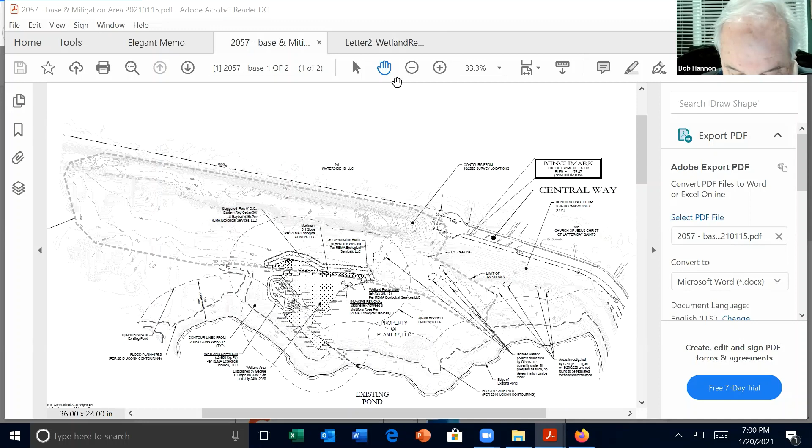First item on the agenda is under new business, show cause hearing, 1179 Farmington Avenue. I believe we've got the owner and all his representatives on the phone.

George, do you want to go ahead? I've got the sketch and your letter, so I'm happy to toggle between the two, and I can pull up aerial maps if we need to. I thought if you wanted to start, and then we have Ed on the phone that can offer some comments. I don't know if Bill needed to say anything before we start. No, I think you can get right into it, George.

Okay, great. So as promised, we have the next generation evolution of the plan based on some discussions. By the way, this is George Logan, REMA Ecological Services, for Mr. Miziarski. So at any rate, this is what we have, and you see the plan there, and there's two plans there.

That's the bigger scale one, and then we have a smaller scale, or is it the other way around? I always get confused with that. Anyhow, the other one's a 20 scale. And there's also a colorized version, which looks very similar to what I had shown the commission the previous time.

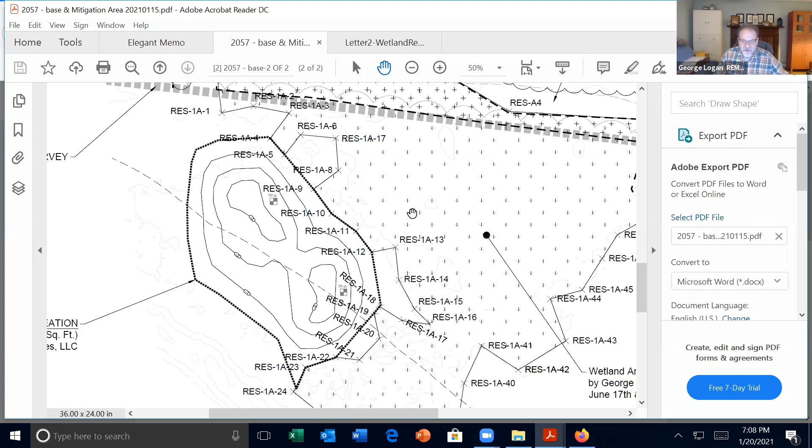So that's what you see there. Now, one thing I also showed, which I discussed previously at the demarcation buffer, is we talked about some eastern red cedars, one of my favorite plants, and also bayberries. We decided to do a staggered row, with one row being bayberries intermixed with the upper row being eastern cedars. We had 36 of one species and 36 of the other, across about 420 feet of demarcation buffer.

And of course, we still have it on the plan, there was a little dense concentration of invasive species in that one spot. That's estimated, and could be larger by the time we get there. We need to remove Japanese knotweed and multiflora rose, which, if we don't, will be a problem in the future, especially the Japanese knotweed.

Let's see, what else can I tell you about this? I think that's it. Shannon, maybe bring up the letter and show some of the pictures, and that colorized version of the so-called 40% plan. Might be 42%, I don't know, something like that. Probably should call it a progress plan.

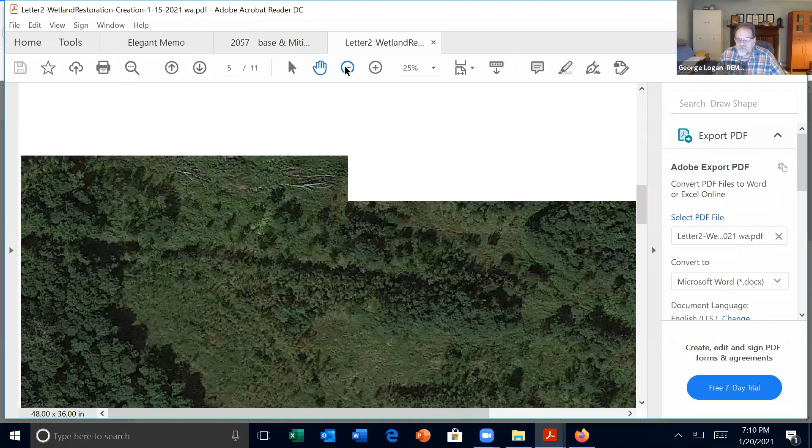So there it is. That gives you an idea of what it looks like on that aerial photograph. You've seen the photographs, I believe, and there's nothing really else to talk about out there.

Now, the way I figured out the edge of this 9,600 square feet was by using the aerial photograph first, then giving it to a CAD operator to put in. However, it might end up being a little larger because there's a slope on the east side of an earthen berm, and I was envisioning we'd probably go to the toe of the slope, which makes sense, and that might make it slightly larger.

But anyhow, I don't think the berm is... yep, right there. I don't know if this line Shannon is showing is correct, or the one that's the edge, but that's something we'll have to figure out before the final plan. We might have to take a few shots out there, and I'd also like to take a few shots within the general restoration area.

Now, there's one thing I keep forgetting about, and Shannon, you might be able to help me with this. At some point last year, we produced, or at least that's my recollection, a report regarding the rest of the fill area to the north. Did I ever submit that to you?

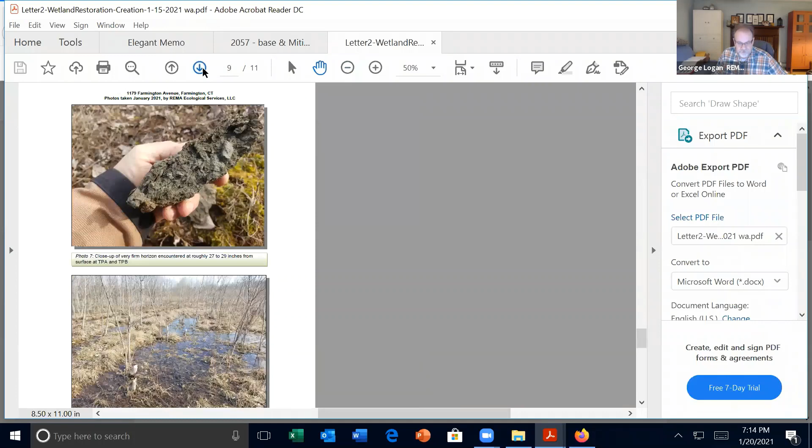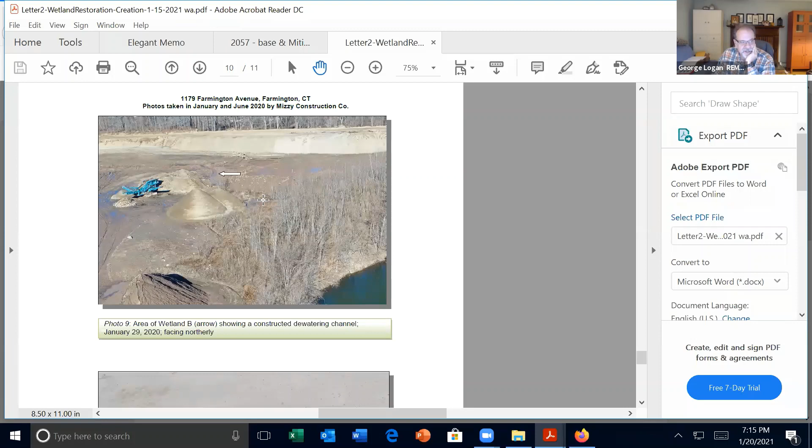I realize that because we did see some amphibian breeding activity back in the spring from eastern toads, and then we saw at least green frogs back in there as the season progressed. However, I did include some aerial photographs, drone photographs supplied to me by Mizzy, that in my mind conclusively show that Area B was actually a sedimentation area or trap. There was a channel very obvious in that picture, and another one that was dug to bring water exactly to that point. I remember going in there and finding some of that finer sediment that was there before I hit the red stuff underneath, which is the dense stuff that was there before. So this was obviously, in my mind, an area that was created as part of this operation.

And our thought was that now that its purpose is gone, and before breeding season again comes late March, to fill that, grade it out with the rest of the area, and then we're creating similar, if not better, habitat in our new creation area. So that was one thing I wanted to bring up and see what the commission's thoughts are on that.

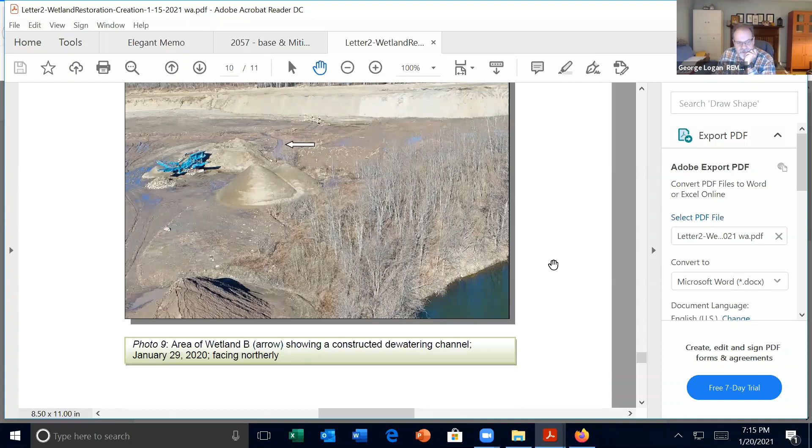The second one had to do with the pre-existing haul road. We had said, and we provided some aerial photographs that we thought were clear enough, that the haul road did go exactly through the area that we're going to restore. But I was using three different years of aerial photographs trying to match them up, and the lines were a little wonky one way or the other.

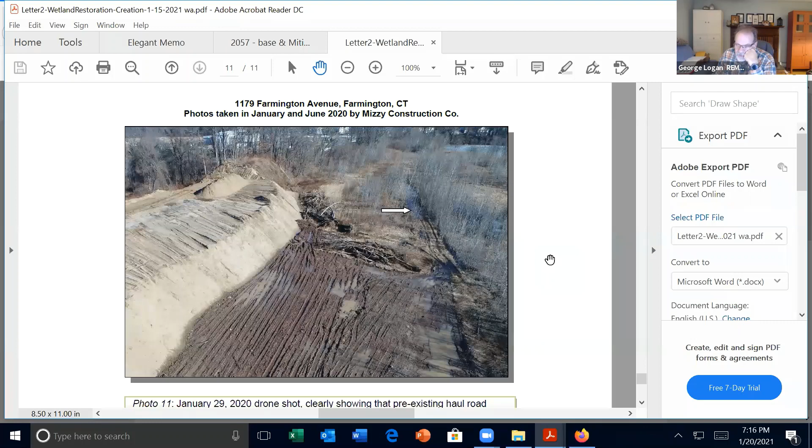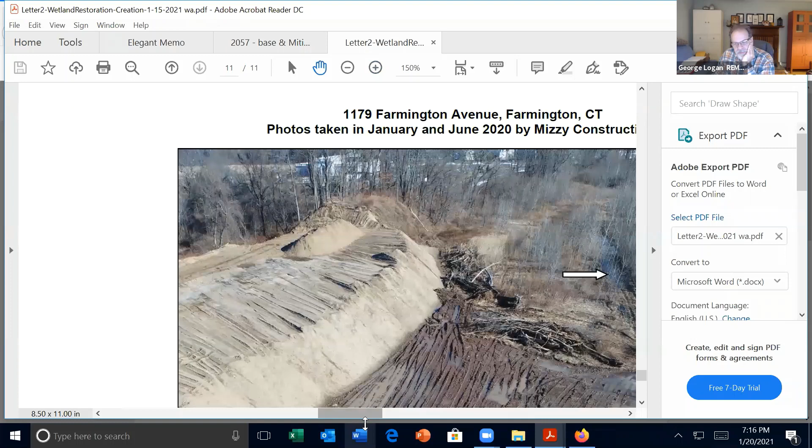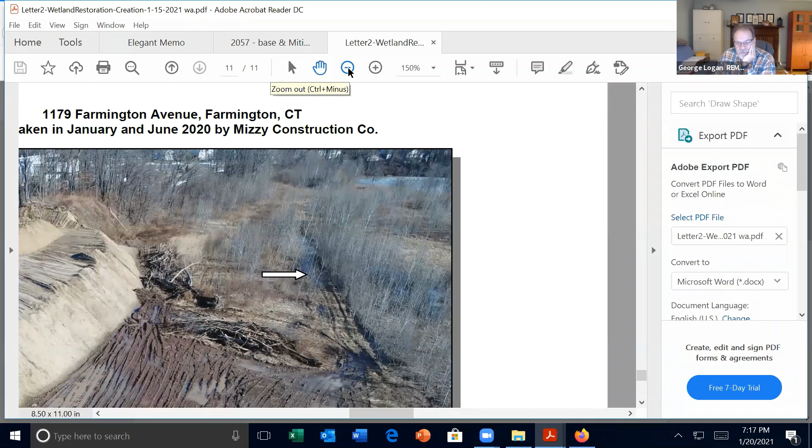So then I found these drone shots that were done literally days before the filling or destruction of that portion of wetland A. And I think, especially if you see the edge of the trees, how it's one straight line that goes through, and you match that with the previous aerial photographs, such as the one from February 2020, and then the ones we provide here, it seems clear to me that the pre-existing haul road, which was quite rutted from trucks, probably large trucks, went right through this area that we're going to restore.

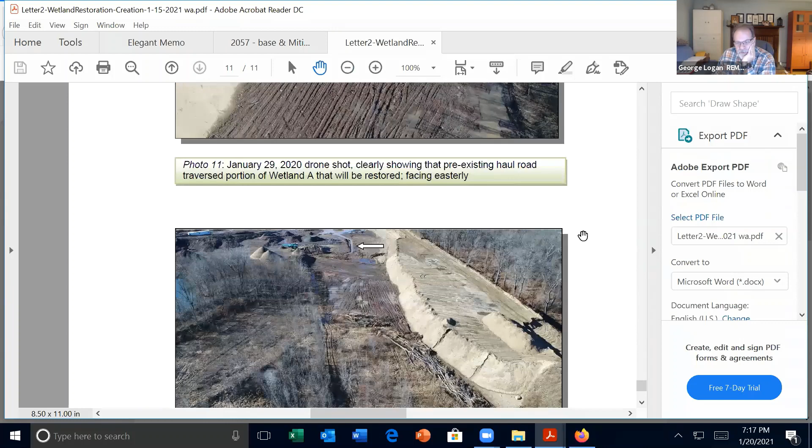Again, not a tremendous big issue, but I know there was a little confusion and possibly a little dispute. We're going to be restoring that area anyhow, so in a way that's a moot point, but we thought we'd bring it up. So those are the three items: the plan, the pre-existing haul road, and the filling of wetland B prior to this year's breeding activity.

Okay. And that concludes my presentation.

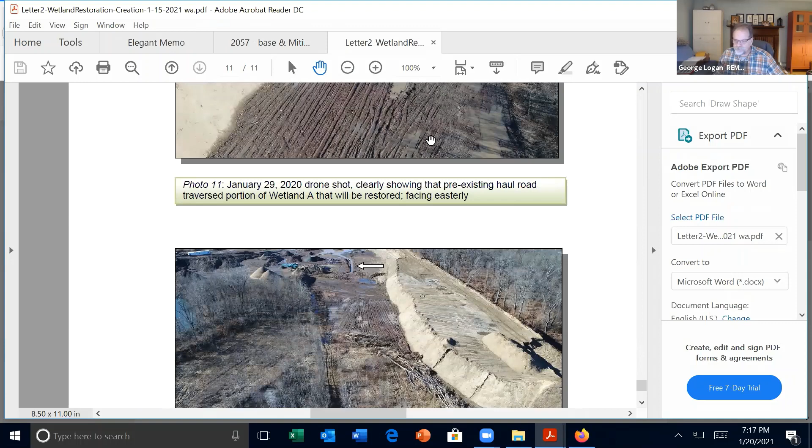Okay, George, I have a question for you. In looking at these drone photos, like the one that's up right now, use that as an example. So that was taken January 29th, 2020. Now, the soil was moved from where it is on the right-hand side and moved to the left-hand side, up to and including the haul road.

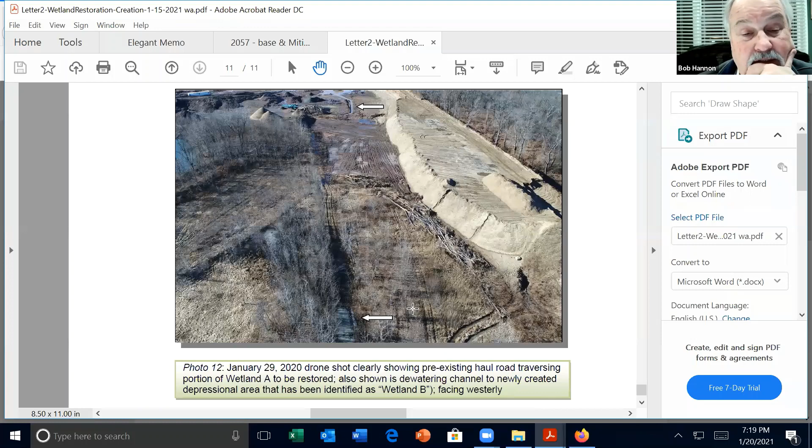That's right. Okay, Robert, you may need to help me on this, but what happened with all of the trees and wood that were on that site? Was that removed or was that buried in place? That I do not know. I don't know who could answer that question. I would assume that if you wanted a stable surface, that those would have been removed. But that's probably a question for Mr. Misiorowski. And the reason I'm asking is because it looks like it could be more than 10 cubic yards. So that's why I want to make sure Robert's sort of thinking the same way I am on this.

Bob, this is Robert Eiser. Yeah, I mean, looking at the photo, it certainly looks like there's tree debris which would be classified under the Connecticut Solid Waste Management Regulations as solid waste. So you're correct, 10 cubic yards would be a threshold for creating a solid waste landfill if that material was left in place.

We just probably would have wanted to bring that up as part of the discussion because that's what the photos are showing. There's a lot of wood there. So that may be something that you need to follow up on to see what was done with a lot of the wood that was dropped in place out there.

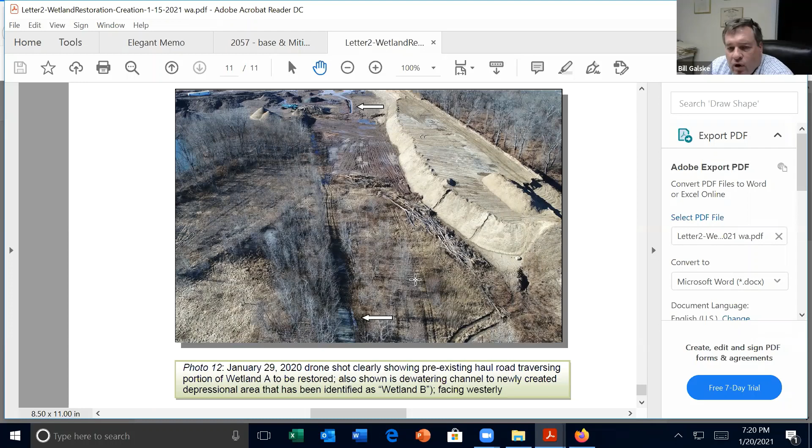Can I speak, gentlemen? Sure. Yeah, I recall when we did our last site walk, if you go back to the area of wetland B, and remember the path of the roadway that leads down to the river, right in there, somewhere in that approximate area, when we were just out there in November, there was a large amount of wood that was lying there. So that may be the wood.

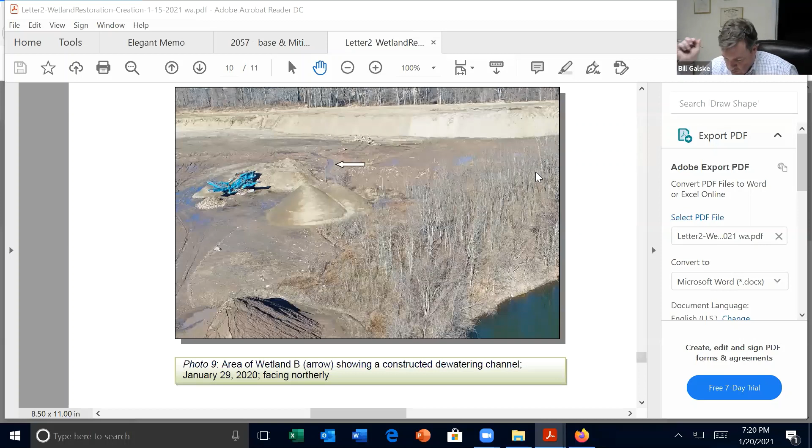I don't know if we have another, if there's any other pictures that would show it, but I clearly remember there being piles of wood that had been moved there. I don't know if maybe some of the earlier pictures we can look at in the SharePoint site and try to find it, or else just go out there and see that it's there.

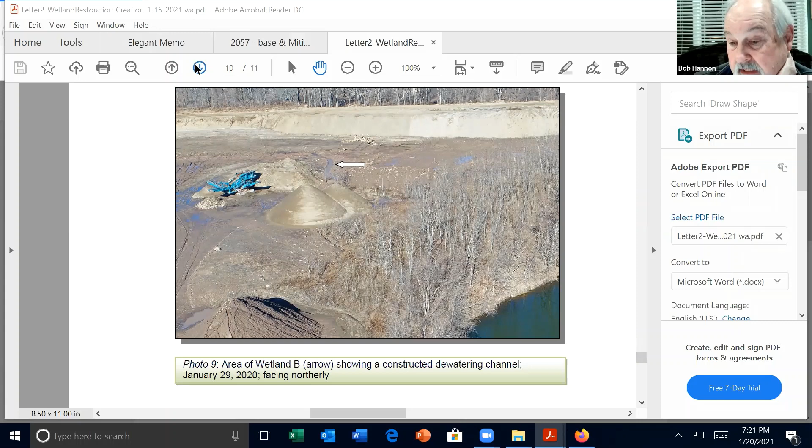Yeah, I mean, the reason I'm bringing up the issue is because if the wood was in fact buried there, that may have created a different problem that is unaffiliated with the wetlands issue. So I'm just raising that issue because the information has been provided to us about the photos, and I'm seeing a lot of wood that's lying out there, and I would just like to know if that wood was removed. Like you say, maybe it was moved to the front of the property. If that's the case, fine. But if it was buried on site, to me it looks like more than 10 cubic yards, which creates a landfill scenario that has not been licensed. So I'm just raising that issue. So somebody's going to need to look at that from your side just to see what was done with that wood. Okay.

I'll take on that, and it may be a simple answer. I'm not saying it isn't, but if it was buried in place, that creates a different issue that's going to have to be addressed, maybe not so much through us, but at least another entity in the state. So, Robert, is there anything else you want to add to that?

No, as you noted, Bob, those are just the statutory definitions for land clearing debris and solid waste disposal area. And Mr. Chairman, I'll note that Commissioner Simpson sent a chat that he has entered the meeting at 7:20, in case you or Shannon didn't see that.

I did see it. Thank you, though. Thank you.

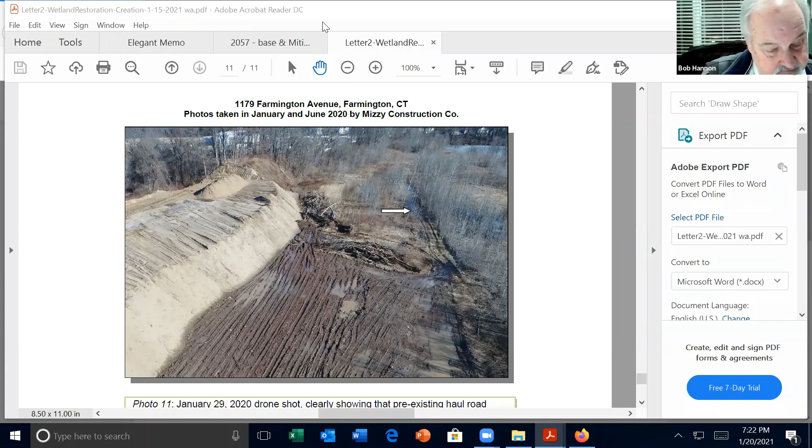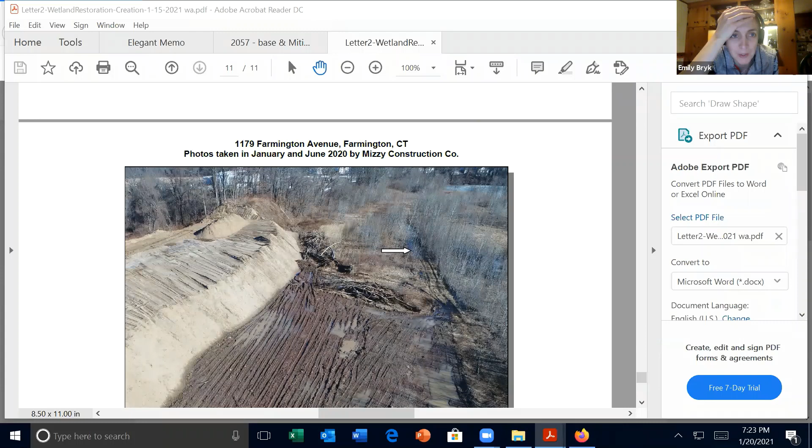I mean, I'm very interested in the disposal concern. I have some questions I'm working up, but would you mind coming back to me? I get a lot of going first anxiety.

That's fine, thank you so much, Bob. We can move on to Dave. Oh thanks, I'm gonna throw him under the bus.

Yeah, I guess I have a couple of questions. I would like to hear from Ed about his reaction to this buffer plan. Going from 15 to 25 is a step in the right direction.

I think there was talk last time of maybe looking for 50 feet. I understand that this buffer is just for the present, and when in the future some development proposal comes in, we would have a chance to look at appropriate buffer for whatever activity is being proposed. I was just a little bit concerned that if we establish a 25-foot buffer here, the pressure will be to not expand it during some future application. So I think that should be kept in mind as we proceed here.

I guess that's about it for now. Thank you.

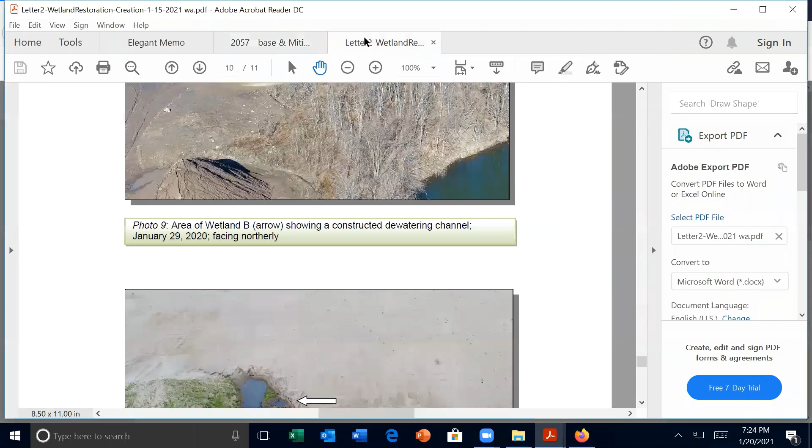Anything about Wetland B or the other comment that was made? I guess Wetland B being a year old at most, and man-made, if those two sump areas in the created wetlands can replace that habitat, it's certainly in a better place. So I'm not overly concerned about that.

Okay, and Shannon, I want to go back to you for a second on the Wetland B. Wasn't that part of the dialogue in terms of where the concrete barrier was supposed to be placed? Correct, Bob, that was part of the dialogue during the last meeting. And we specifically said we were gonna try and stake that barrier between Wetland B and the piles so that Mr. Mizzy had access to those piles.

But staff has issued the revised enforcement order to allow the activities that were discussed at the meeting earlier in January. At this point, to my knowledge, those barriers haven't been put in place. We had specifically requested that we be notified so that we could be on site when they go in place. But to my knowledge, they haven't been placed. So that leaves this open for discussion with respect to that for the commission.

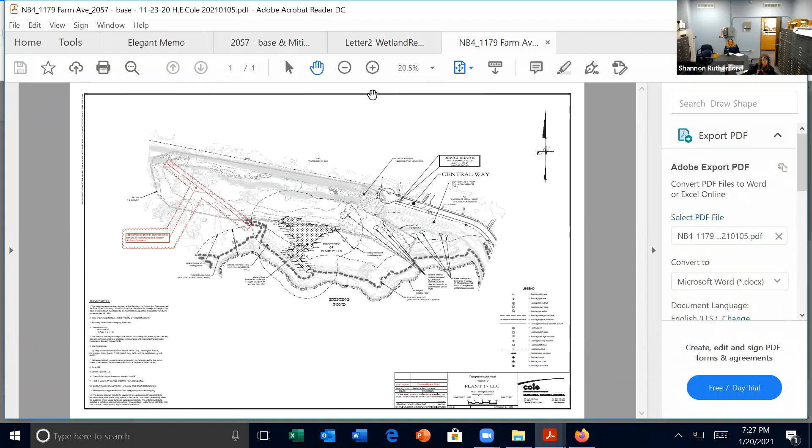There we go. So this shows the barriers, and I've got to see, so this one did not show Wetland B. Give me one sec. That was located to the east. It was, I just—

So here, so we've got to put the aerial together. I think if I recall, I used the edge of the pond as the reference. So we've got the edge of pond, and Wetland B basically shows up, and you can see these two piles.

And so it should line up with the edge of pond. And then if we click back to where the barrier is, so edge of pond, there's certainly a heavy contour here. So we were loosely discussing that Wetland B was somewhere in this proximity. We're just trying to compare the two documents. So yes, we had discussed kicking the barriers down

so that it left access to this material, but still protected the wetland. As I noted that, Attorney Galsky confirmed the barriers haven't been put in yet, so that work hasn't taken place. Okay, I just want to make sure I was thinking clearly on this and had the right picture in my head. Thank you.

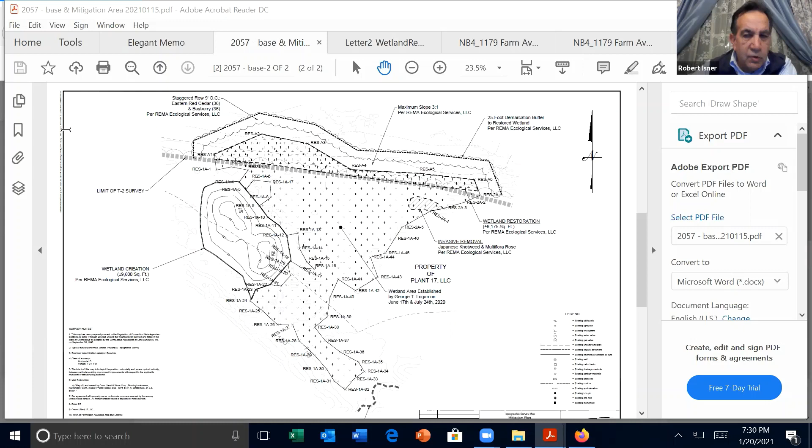As Commissioner Fox said, I'll be interested to hear Ed's take on the most recent report. From the overview provided by George, it's good to hear that Wetland A is going to be fully restored. On Wetland B, I think it could be okay for the proposed filling, but I'd want to hear Ed's take on the functional value. When we were out on the site walk, it looked like it was supporting some amphibian life, so what was recently created may have value. If it's low, filling could be okay as part of the overall plan, recognizing there's going to be enhancements and mitigation elsewhere. I also agree with Commissioner Fox that going from 15 feet to 25 feet as the buffer distance is good, but I have that same concern that once we establish 25 feet as the buffer, it may be difficult to increase that. So maybe looking to increase it out to 50 feet now would be prudent on our part. The haul road discussion seemed fair, the explanation was fine, and the proposal to restore that seemed good at this point. That's the end of my comments.

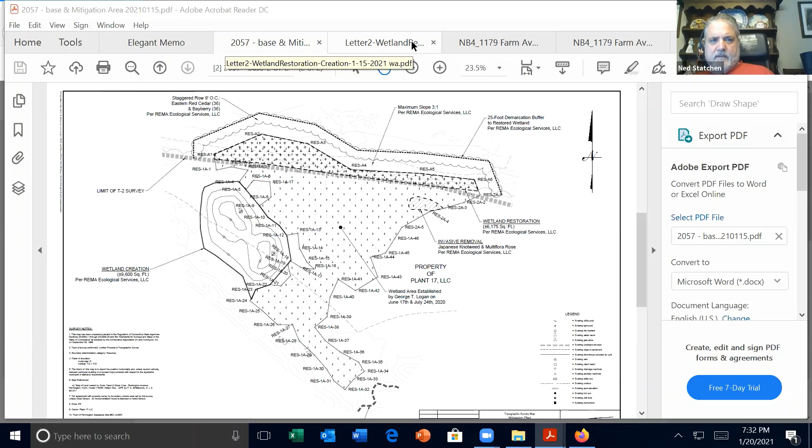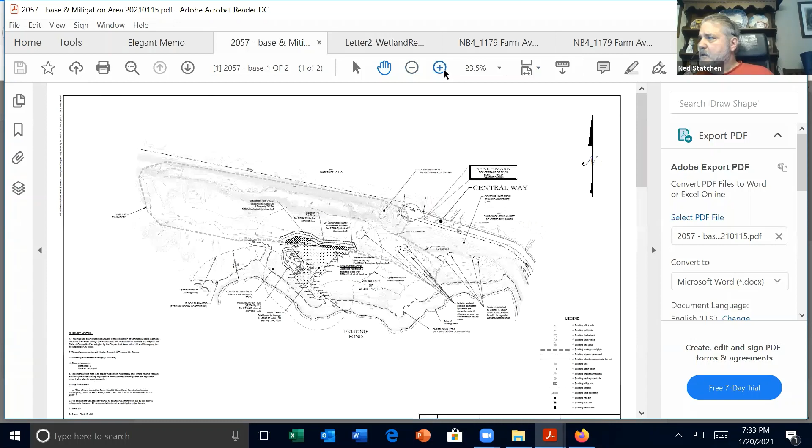I was muted, sorry. The wetland creation area is 9,600 square feet. I want to know, what is the approximate area of Wetland B? Do we know that? Probably about 1,000 to 1,200 square feet. Okay. And is this still going to be out of the floodplain, the wetland creation area? Because I would think it could. Yeah, it is. I think you can see in that map in front of us right now, the dashed dark line at the bottom of the screen, that's the floodplain elevation. So that's how close it gets, but no further. Okay, I see. So you're going to be well out of that.

I would just kind of go along with the feeling that if we increase the wetland area with the creation area substantially over what Wetland B is, then we might be able to live with filling in Wetland B. Like you say, the timing of it is important. I'd like to see it before anything started to take place in the springtime. But that's all I have for now.

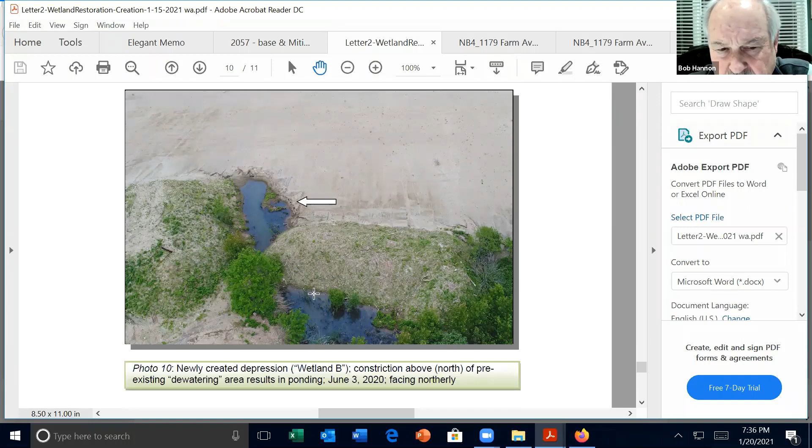So George, do you have an idea as to what the purpose of the sedimentation basin was originally? Or can somebody else answer that? I'm just curious as to, one, why it was created, and then to follow up on that, why it's no longer needed. Is the activity that needs to be conducted no longer taking place on site?

Well, my understanding is this: when this work was being done, they wanted a place to get the water to. So they didn't go to the pond, didn't go to the Farmington River, but it went to somewhere where it would stay there and infiltrate. And that was the idea of getting that swale down to that area, and it ended up with all the work that was done around it creating this depressional area.

Obviously, because the land got raised on two sides at least, right? So it kind of isolated, and the water kind of connected there. But that was the idea. Now it's not needed anymore because this area has been sufficiently stabilized, at least to a great extent, and so it has been abandoned.

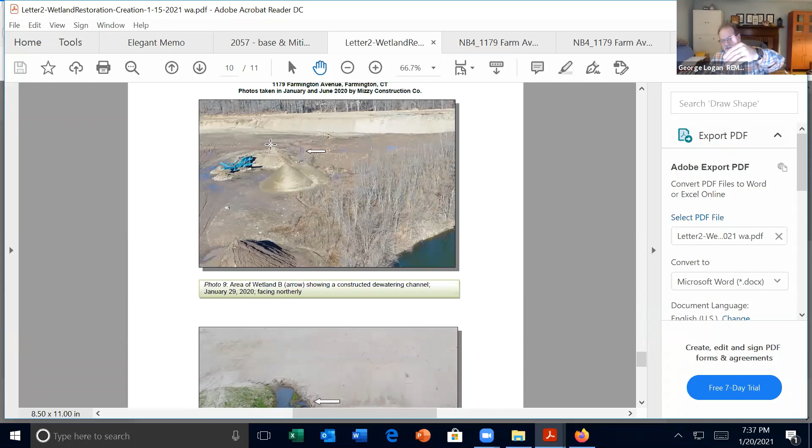And plus, what happened at that time, if you see the early picture, there was a pitch from the west coming to the east and then down here, and then when all that soil from the berm got placed, it raised it up, so the water couldn't get there anyhow anymore. But in the early portions of the operation, that's what was happening.

So that sedimentation basin was not initially put in to minimize any type of sedimentation associated with specific activities of the project. It was more just for trying to collect sediment and infiltrate water. Am I hearing that correctly?

For the most part. I mean, I can't completely say, I wish that Stanley would probably be the best person to talk about that, but that's my understanding from talking about it, that when they were doing this operation, they needed to get the water out somewhere, and so they decided to create that swale in the early portions of the operation, and then as it progressed, they didn't need it anymore, but it was there because they created it.

Okay, again, I'm only asking because usually when you see a sedimentation basin go in somewhere, it's typically because there's some activity that is going to trigger the need for that. So I'm just trying to make sure that I understand if there was or was not a specific activity being conducted on that site, which would have required the implementation of a sedimentation basin.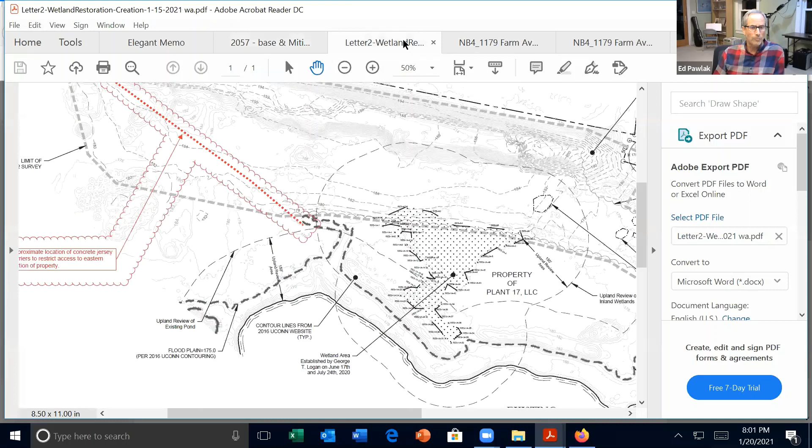Before I leave wetland B, I wasn't aware, since I hadn't explored it, of the area to the south of wetland B, which Mr. Logan described as the southern lobe of wetland B. You can see the pinch point between the delineated wetland B and the ponded area to the south. That's the area Mr. Logan was describing, where he mentioned observed cattails and phragmites.

I've not explored that area at all, but given the unpermitted filling of wetlands that has taken place on this property within the past year, I recommend the commission request that the applicant have that southern lobe of wetland B delineated, surveyed, and put on a map for posterity, so there's no question in the future that this area was determined to be a regulated wetland at this time.

Finally, regarding wetland B, there's an area to the west which has not been delineated as a wetland, but in my previous letter I included photos of it, a similarly ponded area. It may have been a sedimentation basin, I don't know, but it was ponded each time I observed it. It's to the west of wetland B, off the stone. That's the approximate area.

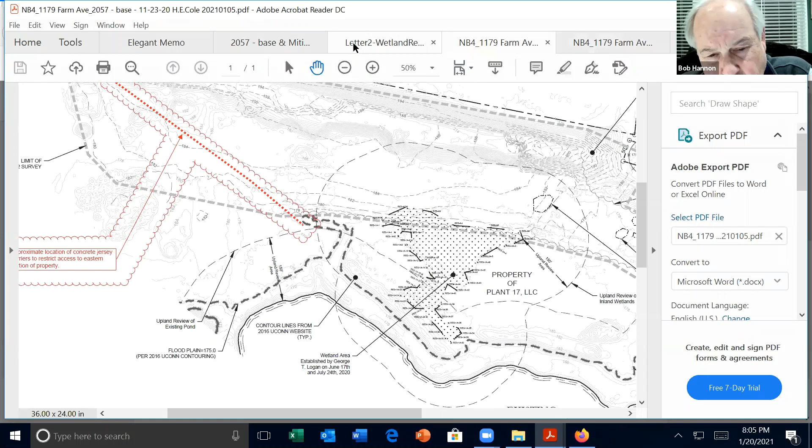With a 100-year flood it may get up, but if you've got some pockets in there similar to what you've got with wetland B—I don't want to say wetland B acts as a decoy pond, because you're actually seeing enough water in there for the tadpoles to survive, grow, and hop out on their own—but if that was something, if it was man-made to start with, is that something you could tap into, that 100-year flood elevation, as a way of getting a little more natural water in there based on flooding control, but yet maintain a depression so you still keep the water in there, in addition to any type of surface drainage?

That's an interesting point. We can't determine from this map, because wetland B is not shown, what the relationship of wetland B is to that 100-year flood line, the floodplain line.

What I'd say off the top of my head is that I wouldn't want to rely on the hydrology provided by a 100-year flood to support the hydrology of the mitigation area, or of wetland B, because its return interval is 100 years, at least theoretically. So you'd expect that area wouldn't be flooding every year, yet you want an amphibian breeding habitat to be flooded on an annual basis, seasonally or semi-permanently. So I wouldn't want to rely solely on the hydrology of a 100-year flood.

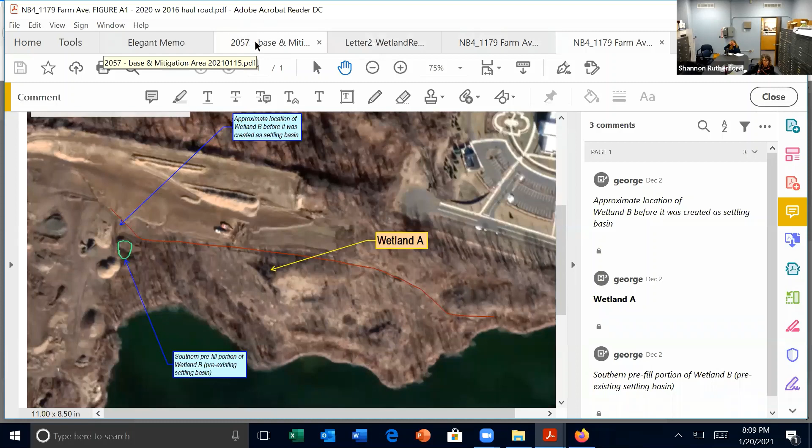Yeah, I can't do these. It's hard to see it on that. It is, yeah. And I can't get them up side by side with this. I can't split screen.

So we would need to have it surveyed and shown here to know definitively. Well, we do know under existing conditions that excavated wetland B does pond and trap water. It receives surface water runoff, ponds it, traps it, and holds it for an extended period of time.

The proposed mitigation area is outside of the 100-year floodplain zone, so we wouldn't be expecting that flooding in a 100-year storm is going to be coming up there or that it arrives at wetland B. So we shouldn't rely upon it. The surface water would have to be coming during more frequent storms from the drainage area.

I think we need to be mindful too that Army Corps and DEP are staying at the periphery of this and continue to be updated. It's been a month or two since I've had to update anybody. But they're looking and trying to maintain assurance that there is not a hydraulic connection to the pond, because we do know with certainty that the pond is connected to the Farmington River.

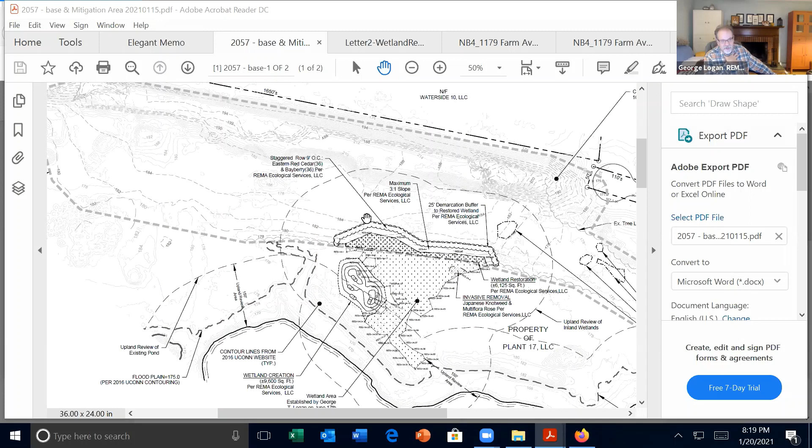I have a list. There are several commercially available native pollinator seed mixes from at least a couple of sources that I can think of. But we've also, what we've done in the past, for instance some of the solar projects, is to specify and tailor our own seed mix from getting individual seed sources from, say, Ernst Conservation Seeds, putting them together for our region, and creating our own pollinator mix. So we could probably do something similar here.

I mean, if an area has to be restabilized, to me, if we can do something like that, it's beneficial, rather than just throwing grass seed mix down, whatever the composition is. At least this way you're creating a more favorable environment for a number of different species, and it all blends well together from a natural perspective. So I'd be looking at something like that. Certainly will incorporate it. Good idea. Thank you.

I can't think of anything else at this point in time. I'll go back and take a look at some of the stuff, and after my head stops spinning a little bit, try to figure out how we're going. But I think some of the comments I've heard from people tonight is that we appear to be going in the right direction. I think that's the biggest thing.

We're seeing some plans come in. We're able to start taking a look at them, make some comments. There are some things that we need to think about. I'm not ready to take an action on Wetland B tonight. That's something I've got to think about more.

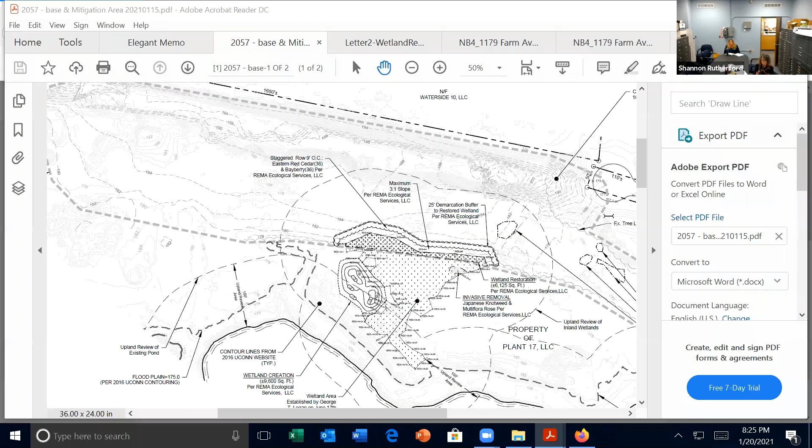And we're looking really a month from now. So I think we need to provide—and I'm open, tossing this out—so Wetland B, if we're talking about filling it, that decision kind of needs to be made by that first meeting in March, if we're going to avoid the breeding season for this year. We might have a little bit of leeway if Mother Nature decides to throw a hard freeze on us, but at the rate things are going, those frogs are going to be jumping here.

Okay, I just want to follow up on Wetland B for a moment. George, first I'll go to you. My understanding, if I'm reading the picture correctly, there was a bit of a swale that was created, which intercepted water and discharged it into a lower dugout area. So you had a swale created which helped redirect water into what is now being identified as Wetland B, correct? To some extent.

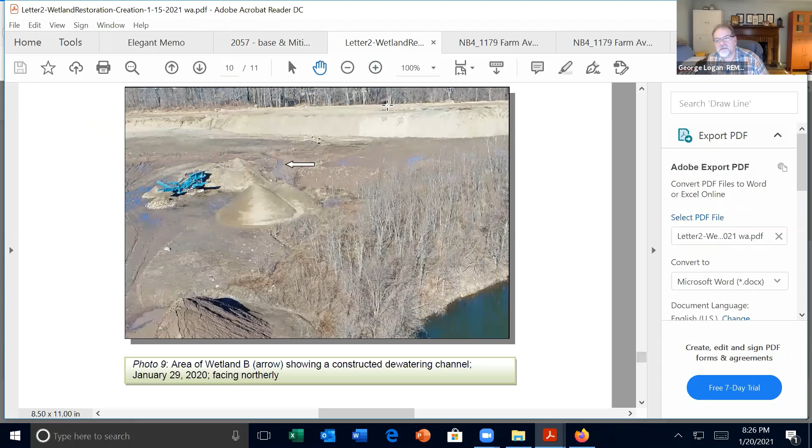So there it is. The swale was trying to redirect water to the southern portion of Wetland B that Ed was saying should be delineated for posterity. And in doing so, with the grading that happened around the northern portion, it created this other flooded lobe. But the intent was to get it to the pre-existing area that was used for sedimentation and water control purposes.

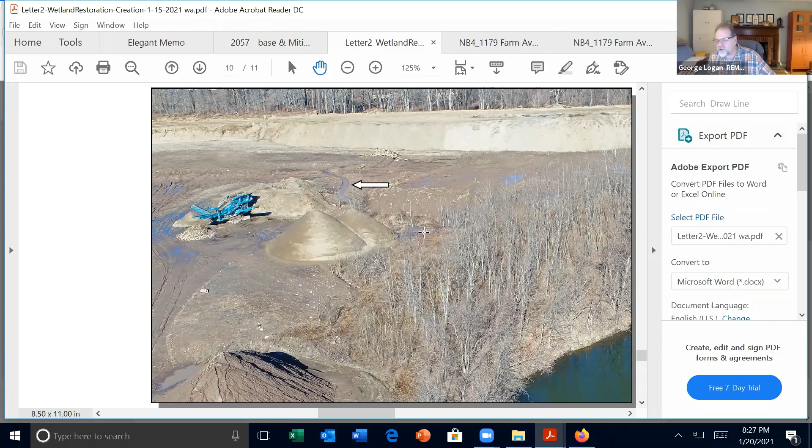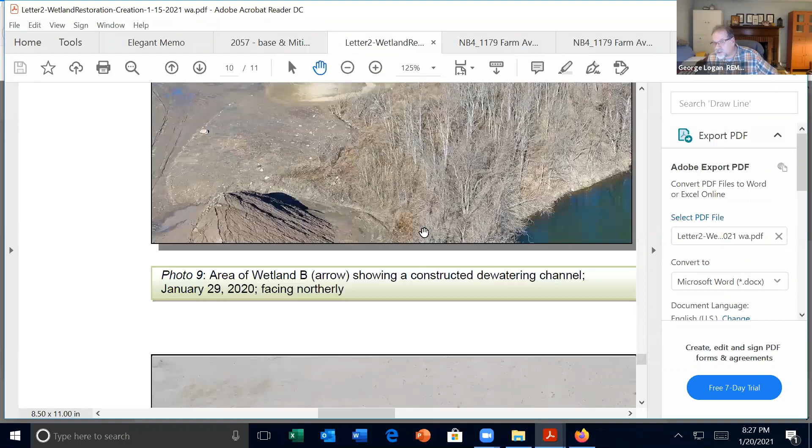By the way, even though I don't think any of us looked at it, when we were seeing the tadpoles in the northern portion of Wetland B, we never went and looked at the southern portion. But I would suspect they were there too, and they'll continue to be there. So that's a good thing. Even if this area was filled prior to, it's not like the frogs and toads don't have somewhere to go. They do, and they'll go there. But I can't say that with 100% certainty because I didn't look at it.

But that's kind of where I'm going with this. You've seen designs for some of the solar projects, like you mentioned earlier. You'll see some drainage swales incorporated around the perimeter of the site to redirect water to a specific sedimentation basin, detention basin, whatever. And I'm just wondering if

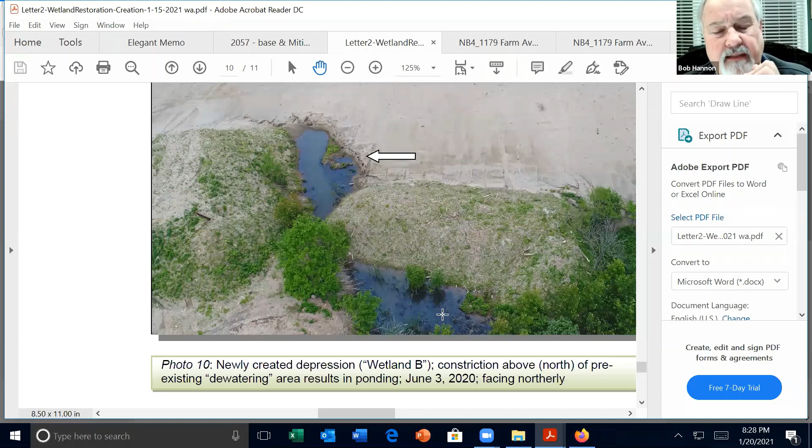this was created by putting in some drainage swales to start with. If this area was filled, would it still be possible to install some type of swale that could be stabilized to move the water further to the east and potentially enhance the wetland area over there? I'm just throwing that out against the wall.

Ed, I don't know, you may think I'm totally crazy on that, but if you had water coming from the western part of the site and it's at least ponding in an area, to me that indicates you've got some water coming through there. But if that swale area were extended to the east, is that something that could help out in terms of maintaining water for the integrity of the wetlands for Wetland A?

That's a good question, and that's something I would have to specifically contemplate without saying something off the top of my head, which I will. If you recall, when we got to the eastern edge of the existing construction area, we climbed up a little bit into the fill area.

So I think the water that used to come this way doesn't come there anymore. The only water that gets to that northern portion of Wetland B is from what's to the north of it, and possibly a little to the west, to the east of it. But again, I'm kind of talking off the top of my head here. So, George, so am I. So don't feel bad.

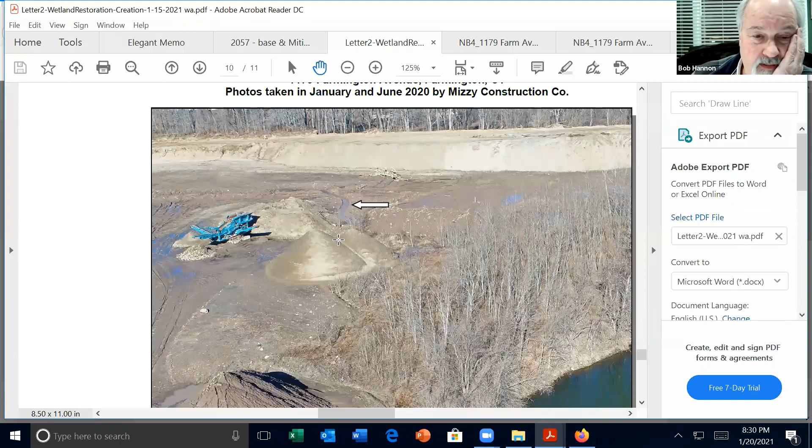I'm going to be out there doing stuff, so I can look into that and come back. But I'm also curious, Ed, is that something that may be realistic? We've used drainage swales in the past to redirect water to certain areas, and some of those swales were planted with specific species to help with water quality. I'm just wondering if something like that is something we should be looking at too—maybe not so much for Wetland B, but taking that water and getting it over more towards Wetland A, which may sustain Wetland A over a longer period of time.

Interesting thought. But I think it all goes to the process that George is going to have to go through in determining whether the drainage area for that proposed mitigation site is large enough to recreate that ponding hydrology that you're seeing right there in the photo in Wetland B.

He's going to have to determine what is the drainage area, how much surface ground is going to contribute runoff down to the mitigation area that I'm proposing. And if it's small, you might start considering what you were envisioning, perhaps a swale to intercept runoff and divert it and bring it over to the mitigation area.

It may be that George determines it's actually not necessary to do that. There's a pretty good sized drainage area already that's going to be contributing to this depression we are proposing to create here. I would suggest, though, for George to think about as well, is to at least estimate the drainage area that's contributing to this wetland B.

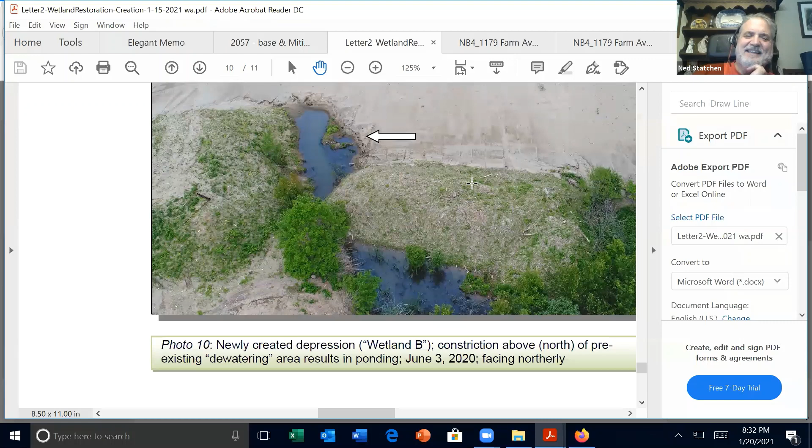This is Ned. I had one other comment, is that I know Ed has concerns in regards to saying, well, yeah, wetland B, the relocation area for wetland A, or recreation area for wetland A, or off of wetland A.

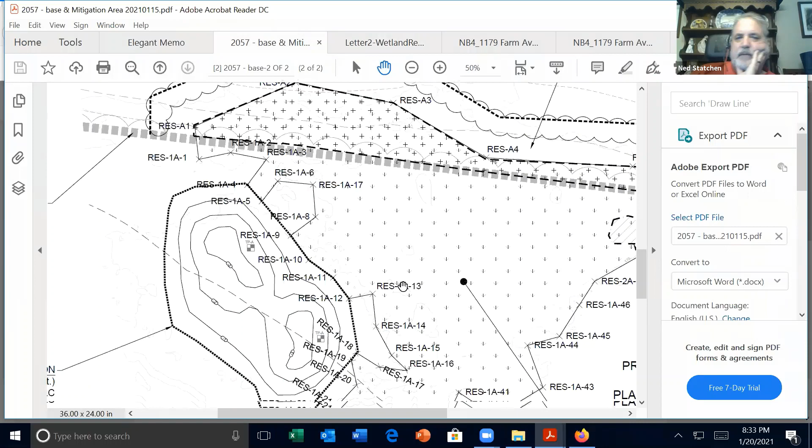It's tough to count on if it's only lines on paper, and wetland B was something that's kind of working. But if we go ahead and include a monitoring period, so that we know if the wetland creation area isn't working, then they're obligated to make adjustments to get it to work. So I think the fact that it's in a much better place for the wetland as opposed to wetland B, right in the middle of all the activity there.

I think we might be worrying too much about whether or not it's going to work, and if we include the monitoring in our final recommendation, so that we know that it will work eventually, because I think the fact that it's relocated to a better area accounts for a lot. So that's just something I'm considering.

Although if that's just a dry basin that's excavated, that won't be functional. Right. But we'll know that with the monitoring, and then we'll have to figure out a way to make it work. They'll have that obligation.

So one of the things that comes to mind, and I'm not necessarily suggesting this, although it's kind of a novel idea, we know that there's water in wetland A. As a matter of fact, you saw the picture from the other day. Obviously it's the high groundwater season right now. If one dug a hole in wetland A down to the confining layer, that would fill with water.

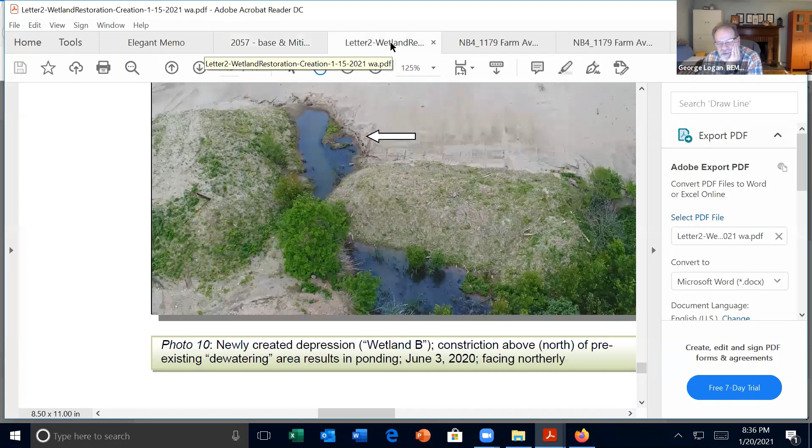So I think the total was about 5.5 feet. I went, and as you can see from the pictures, I put my auger there. I should have had a tape measure when I did it, but I didn't. I forgot it at the car, and I was too lazy to go get it. So I was using my auger as a measuring stick, if you will.

But we went down a minimum of 5 feet. So my auger is 42 inches, and it hasn't reached the top yet. Okay, yeah, so that kind of gives you an indication. And the other one is about the same.

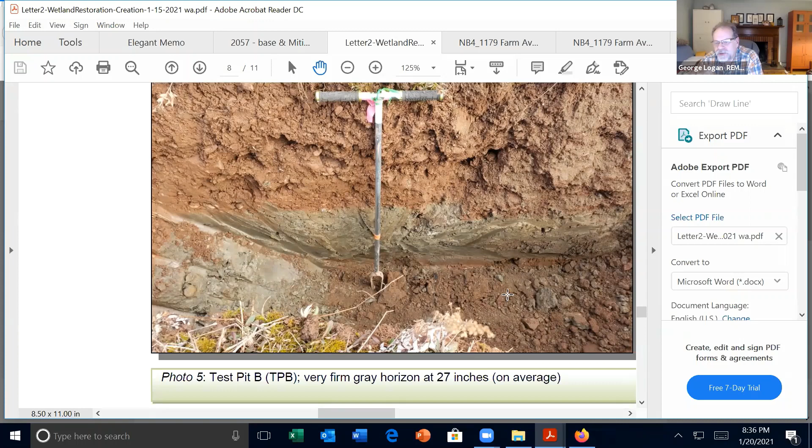And at any point did you have water seepage in on any of them? It's tough to tell in the photos. No, I didn't. And that's a good observation, and one that I'm mildly concerned about. But again, that material there, the red material, is somewhat different from the material that immediately underlays wetland A, which is a little more coarse.

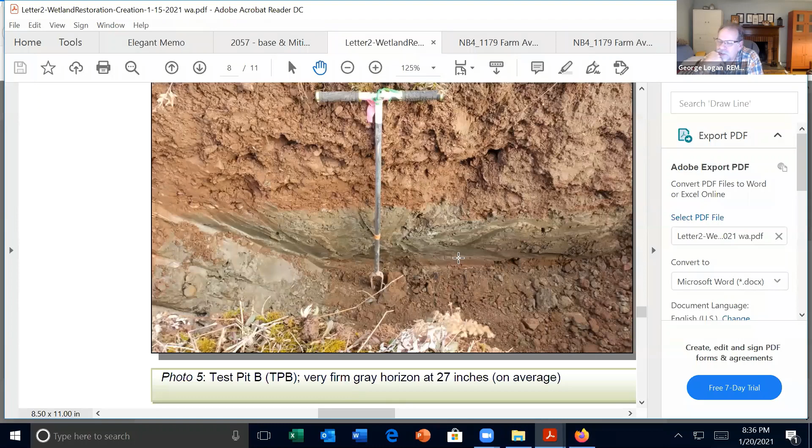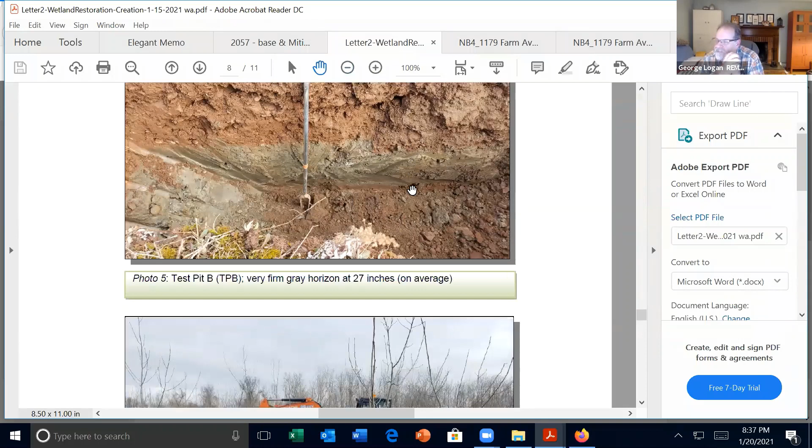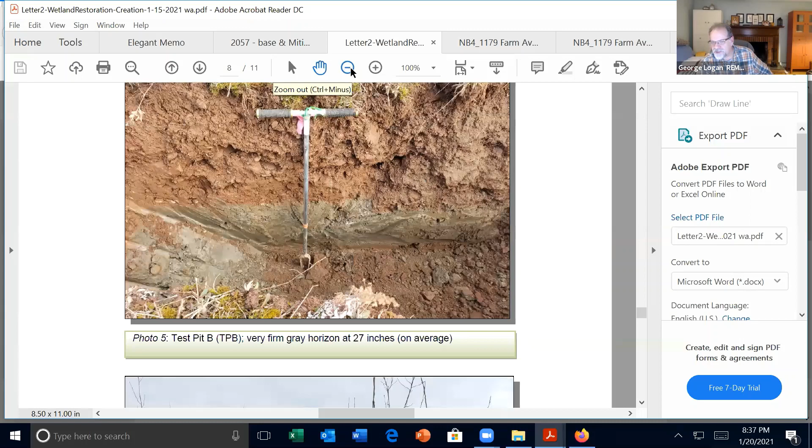So the thing that we're going to have to figure out here is how we can key the mitigation of the created area to Wetland A and to its watershed. And if we can do that, then we're going to have a guarantee. The conservative approach is also to utilize that organically rich topsoil, which will have a higher water carrying capacity, which will keep things moist and wet for a longer period of time. So those are some of the thoughts that I'm having.

But again, Ed is right. Hydrology. Okay.

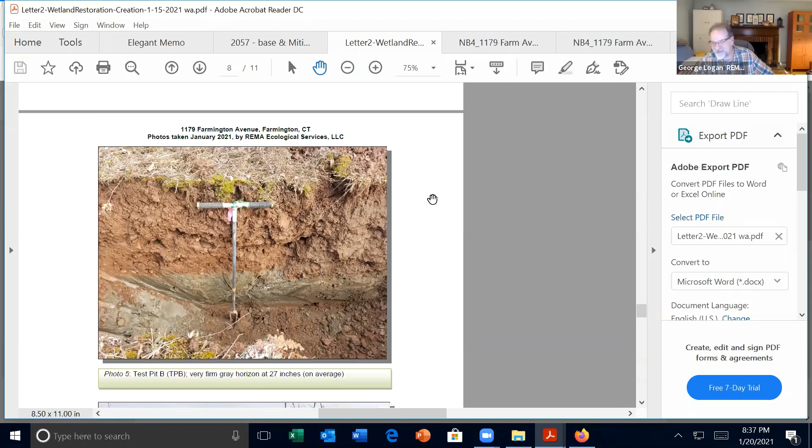It sounds like we don't necessarily need a written document from Ed outlining his thoughts from this evening. I'm thinking maybe we'll say let this advance to the next step. As you folks have additional information on Wetland B, we can put this on the agenda for two weeks from now, see where everyone stands, and then go from there.

I think the way that I'm looking at it is that at the far end we're going to have detailed implementation notes - how we're going to do this, what's the procedure, et cetera, planting schemes, seed mixes, et cetera. But that's out there. I think some of the things that Ed raised today, such as ensuring the hydrology of the created area, and looking at the demarcation buffer and its slope, and looking at some of those seed mixes we could put in there for enhancing that.

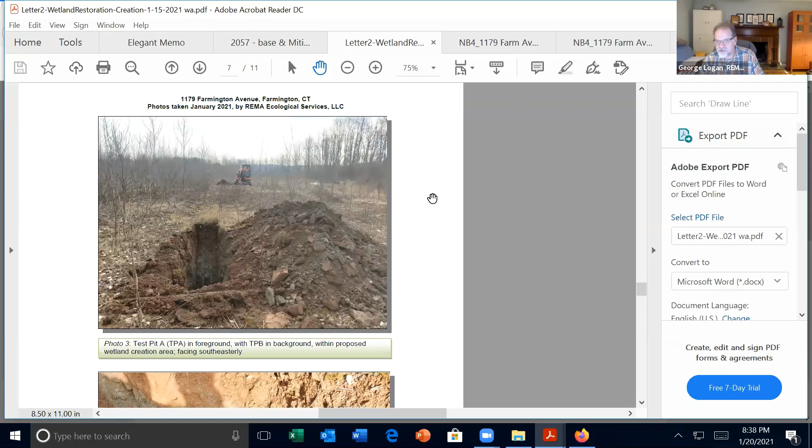Those are all things that I can do first. Whether I do it in the next couple of weeks - yeah, I probably can do some of that in the next couple of weeks. So we can at least advance it to the next point.

Commission members, as you're reviewing this, if additional specific information or questions come up with respect to Wetland B, and what you would need to make a decision with respect to filling that - if something comes up, feel free to email me and I will pass that along to both Ed and George simultaneously, so everyone's getting the question at the same time. We'll put it on the agenda for two weeks from now and see what else gets added to the agenda, and we'll go from there with how we organize it.

Okay. But I would like to thank everybody for a nice, healthy discussion this evening. I think it was very beneficial. Thank you. You're welcome. Thank you.

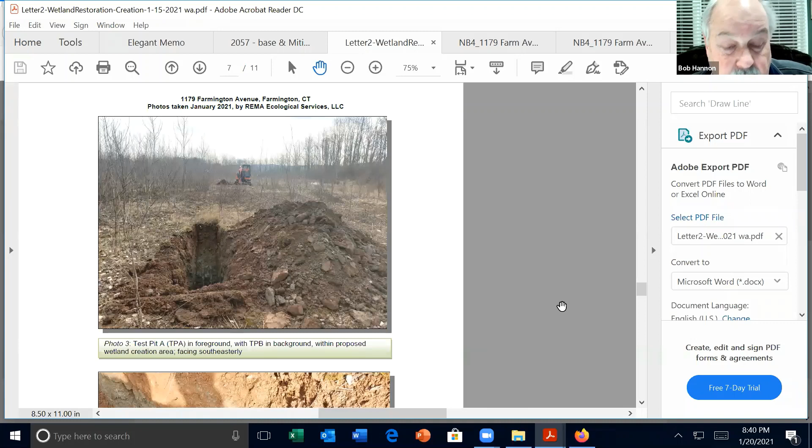So I think that's it for new business tonight. Unless Attorney Galsky, you have anything else to add on this matter? Otherwise we're going to move on to other items. No, I'll just follow up on that other issue with the wood. Okay, thank you. All right. Thank you. Have a good evening, everyone. Good night, take care.

Next up on planner's report, 16 Clearbrook. I just wanted to provide a status update.

The owner has engaged Ian Cole from the last meeting, and he also has had Juliana Pools out. Rather than an engineer, they're working with a landscape architect on this, and so they're going to use the survey - they've got a recent as-built survey - to get this all laid out and have everything identified. So the owner's been fairly conscientious, following up and keeping us up to date, and sounds like he's engaged the appropriate professionals to continue to advance the plan for his backyard, as well as the restoration needed for some of the cutting that had taken place. So that's it for an update on that one.

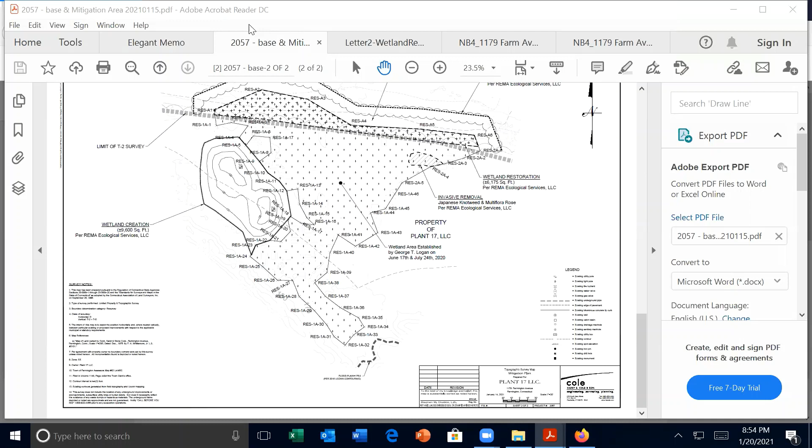All right, so if there's nothing else, we have the minutes of January 6, 2021 for the Conservation Commission meeting. Can I get a motion to approve? So moved, Statchen. Is there a second? Second, Statchen. Okay. Any questions, comments, corrections? Hearing none, those in favor? Aye. Opposed? Abstaining?

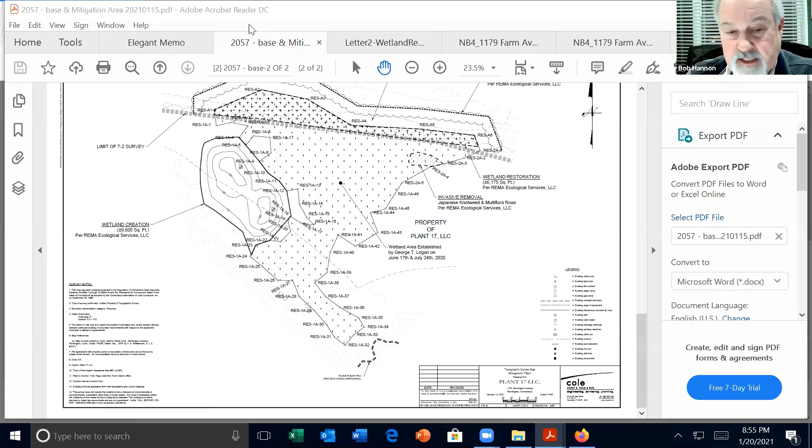Thank you. All right, thanks. Thank you, and thank you a lot. Good night, good evening, everybody. Bye. Bye.